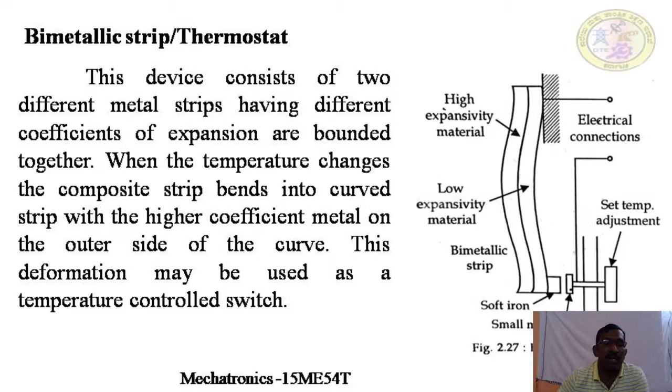Let us discuss the bimetallic strip or thermostat. This device consists of two different metal strips having different coefficients of expansion bonded together. When the temperature changes, the composite strip bends into a curved strip with the higher coefficient metal on the outer side of the curve. This deformation may be used as a temperature controlled switch.

As temperature decreases, the strip bends. A small magnet attracts soft iron, that is, the circuit is closed, and hence the flow of current causes the temperature to increase. The strip again straightens and the contacts get opened, cutting off the flow of current.

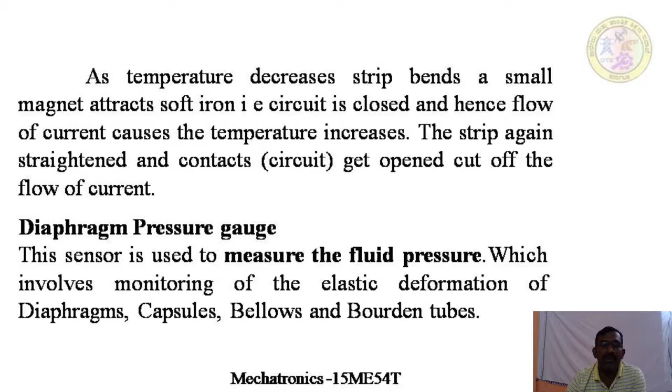The next one is the diaphragm pressure gauge. This sensor is used to measure fluid pressure, which involves monitoring the elastic deformation of diaphragms, capsules, bellows, and Bourdon tubes. In diaphragms, when pressure is applied on one side, the center of the diaphragm displaces, resulting in corrugations in the diaphragm. This movement can be measured by a strain gauge attached to it.

Capsules consist of two corrugated diaphragms combined together to give greater sensitivity for a small pressure variation. Diaphragms, capsules, and bellows are made from stainless steel, nickel, rubber, and nylon.

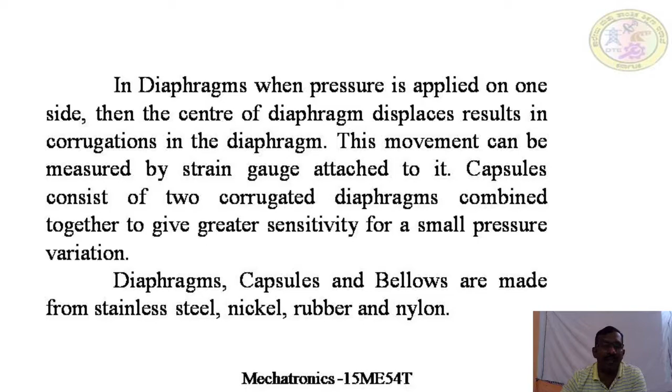Figure A represents a flat diaphragm before the application of fluid pressure, figure B shows the corrugated diaphragm after the application of fluid pressure, and figure C shows a diaphragm with a strain gauge. The strain gauge measures the fluid pressure by measuring the corrugations on the diaphragm.

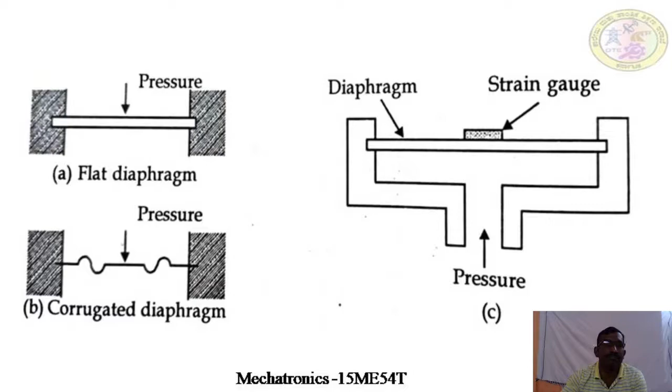Next one is the strain gauge load cell. A strain gauge load cell is a force measuring transducer. It consists of a cylindrical tube to which strain gauges are attached. When force is applied, the cylinder gets compressed. Then the strain gauges give a resistance change, which is a measure of the strain and hence the applied force. Such load cells are used for forces up to about 10 meganewtons.

So this is the diagram which represents the measurement of a force using strain gauges. This is a cylindrical body, and there is a force acting on either side of the cylindrical body. Because of the force acting on the body, the cylindrical object gets compressed. This compression is directly proportional to the force applied, and this compression can be measured by the strain gauges.

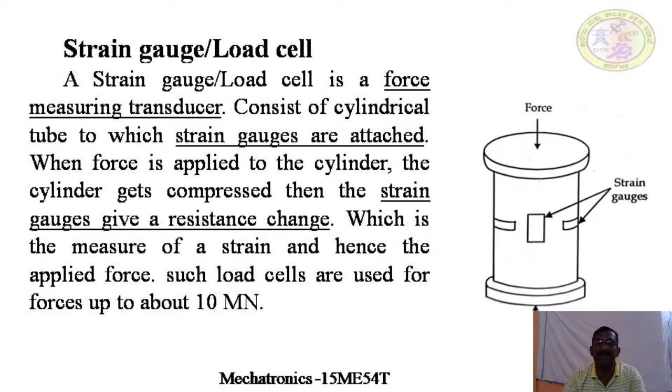Applications of strain gauge load cells: measurement of force. We can use these strain gauge load cells for electronic weighbridges for weight measurement, portable electronic weighing machines for the measurement of weight, and measurement of impact forces. These strain gauge load cells are used in feedback control loops and also for the calculation of center of gravity.

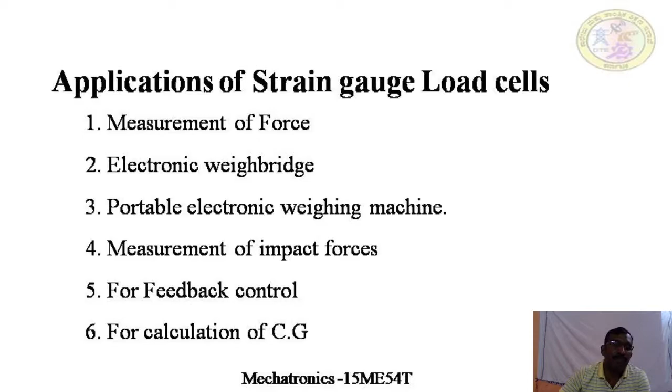Piezoelectric sensor. These sensors are used for measurement of pressure, acceleration and force. They are also called piezoelectric transducers. These sensors are devices which, when stretched or compressed, generate electric charges, with one face positively charged and the opposite face negatively charged, resulting in voltage production. This is known as the piezoelectric effect.

A simple piezoelectric sensor is quartz. When force F is applied on either side of the material, it gets compressed and produces net charges on its surfaces proportional to the force applied, which can be measured by converting it into electric signals or voltage.